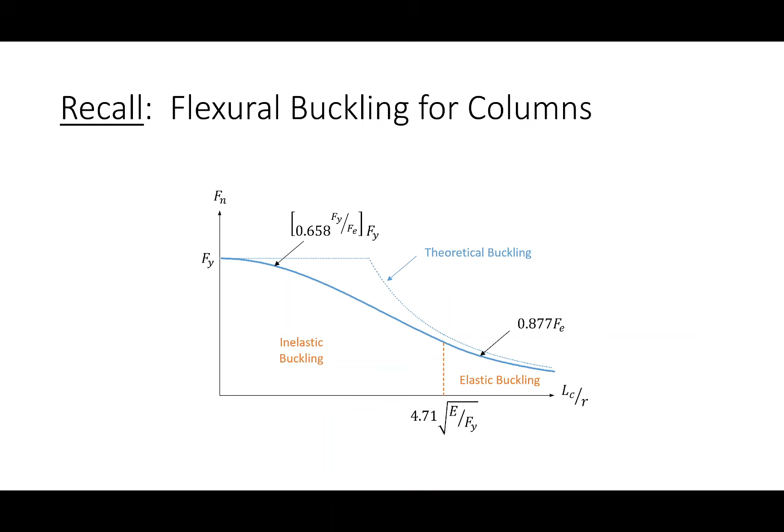Now, we can do that with columns, right? So with columns, we divide out that R to get the L over R term, because this curve really works for any column in the book. Now this curve does too, but because it's so multi-parameter, there are so many different parameters that go into the beam curve, there's a unique beam curve for every beam, which is why we just go with LB. But it's the same idea: we take a look at our slenderness and compare that against our curve to see what range we're in, and based on that, we determine our capacity.

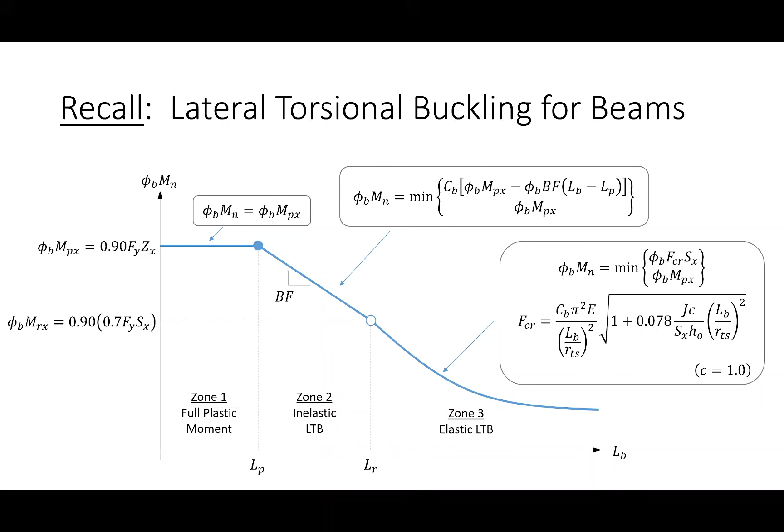Both of these curves, whether it's the column curve or the beam curve, have a latent assumption baked into the background: that local buckling does not happen, or at a minimum, doesn't happen first. If you go down to the lab and start testing columns and beams, loading them to failure...

If you bend that beam like crazy, you'll find that failure is usually a mixture of global buckling and local buckling. It's just a question of which one happens first. This entire semester we've been assuming, although we haven't really been talking about it, that global buckling happens first, and we haven't really been considering local buckling.

So, all right. Does that make sense?

Does that make sense? Okay. Now, like I said, the big question about local buckling is whether it's going to occur before global buckling. The answer is no, you can sort of ignore it, because the idea is... let me put it this way.

If we go back to tension members, we were looking at gross section yielding and net section fracture. If I find that net section fracture occurs before gross section yielding - say net section fracture capacity is 200 kips, gross section yielding is 300 kips - I can ignore gross section yielding. That doesn't matter anymore. What matters is the limit state that governs.

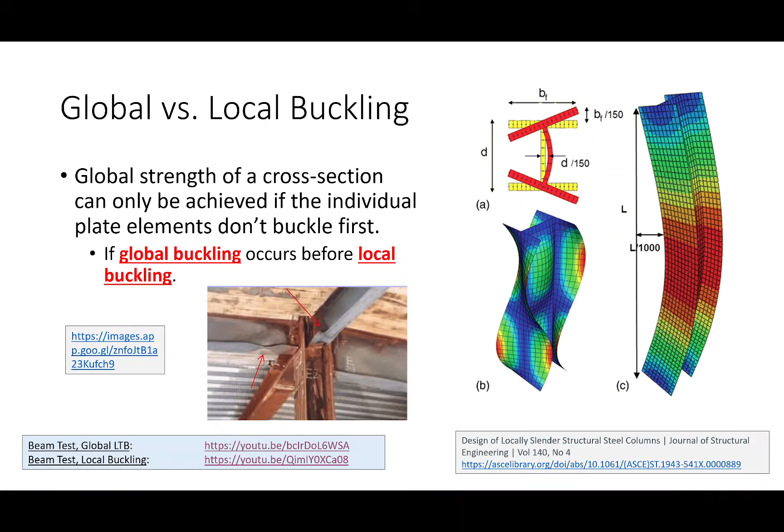Now what I'm saying is that for the vast majority of elements we've been looking at, local buckling hasn't happened first, but there are instances where it could happen first. In general, if you don't know, then you need to establish that first.

I'm not one to, I'll admit one of my pet peeves is when I'm in a presentation and somebody presenting their work goes back and says, you know, I did this during my research, and then it has absolutely nothing to do with their topic. They just wanted to talk about their research, you know, look at what I did. So I really don't talk about that much in class.

We were trying to apply that as a modular system for accelerated bridge construction. One of the things I was trying to do in my dissertation was figure out its capacity - how do you calculate the flexural capacity of a beam like that? Because you need to do that in order to design with that beam.

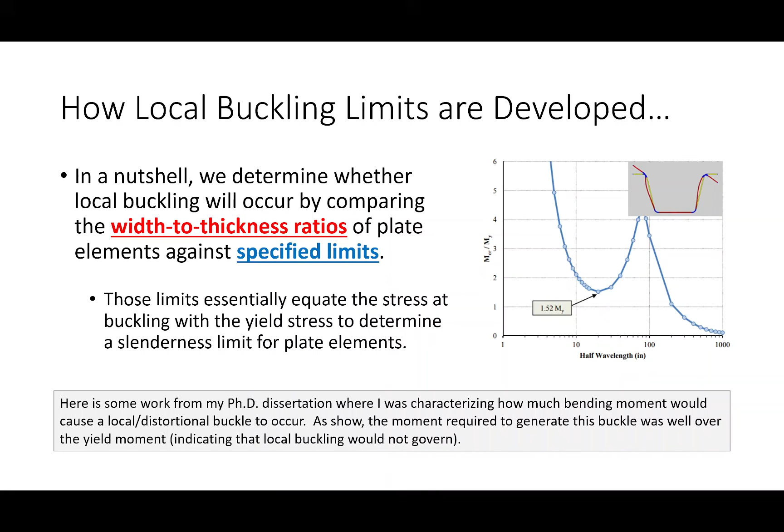So basically that told me that I didn't really need to consider local or distortional buckling for my capacity, and really the only thing that mattered was the global regular old LTB we've been using this whole time. And so that was one of my findings in my dissertation.

Now, I wanted to mention it because that method is basically the same thing that AISC uses in the establishment of limits for local buckling for columns and beams. So how does this work?

Let's just limit our discussion to W sections. If you go to any of the pages for W sections, we have what are called compact section criteria. For those compact section criteria limits, what we list is a ratio BF over 2TF and a ratio H over TW. We've already used this one a little bit because we used it for shear.

Now these are the slenderness measures of the associated plates of a cross section. So if we're talking about an I shape, H over TW is the width to thickness ratio of this plate. So the bigger that H over TW is, the more slender or the more flimsy that plate is.

In the case of a flange, what we're worried about is not the entire flange, we're sort of worried about this outstanding element of the flange here. Think of this as a boundary condition and this is a free end. So what we care about is this width over this thickness, so that's half of this divided by TF. That's why there's that 2 there.

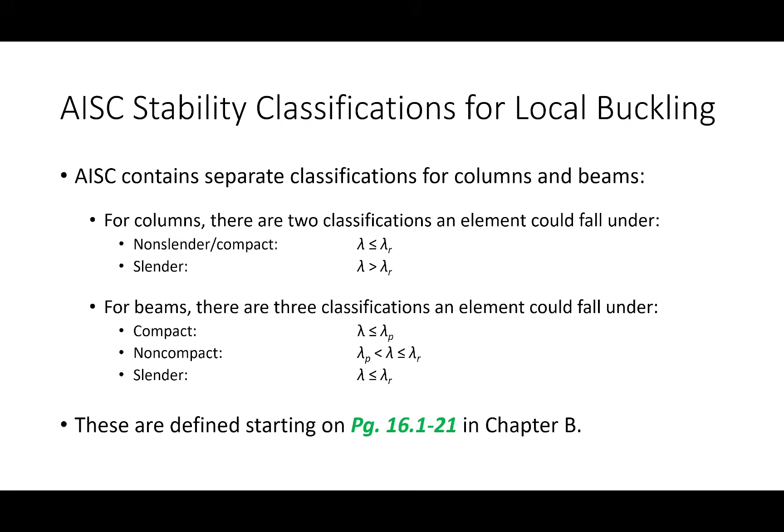Now, where do we get these anchor points like this lambda P and this lambda R? We get them in the spec, in chapter B. This is on 16.1-21, I think. I would open to that right now. So this is in chapter B, the general requirements that pretty much every shape needs to assess.

Now there's a table B4.1, and that's split up into 2 sections. There's a B4.1a and a B4.1b. I want to make sure everybody can find this.

So, I think the B4.1b table actually goes across 2 different pages, like there's a front and a back. Is everybody able to find that? Looks like most people are able to find it.

Okay, so there's 2 tables, B4.1a and B4.1b. So what does it say? Width to thickness ratios, members subjected to axial compression. So B4.1a, that's my column table. B4.1b, members subjected to flexure, that's my beam table.

Now, one thing I did kind of gloss over a little bit, there's a table for columns and a table for beams. But look over here on the very left. So on the column table, there's a range of cases for unstiffened elements and a range of cases for stiffened elements. So what's the difference between those two?

Unstiffened elements are plate elements that are only supported on one edge. An example would be the flange of an I-shape. If we're talking about angles, like the leg of an angle, it's supported on this end but not this end. Or if we're talking about this leg, it's supported on this end but not this end. What about T-shapes, the stems of the various outlying elements?

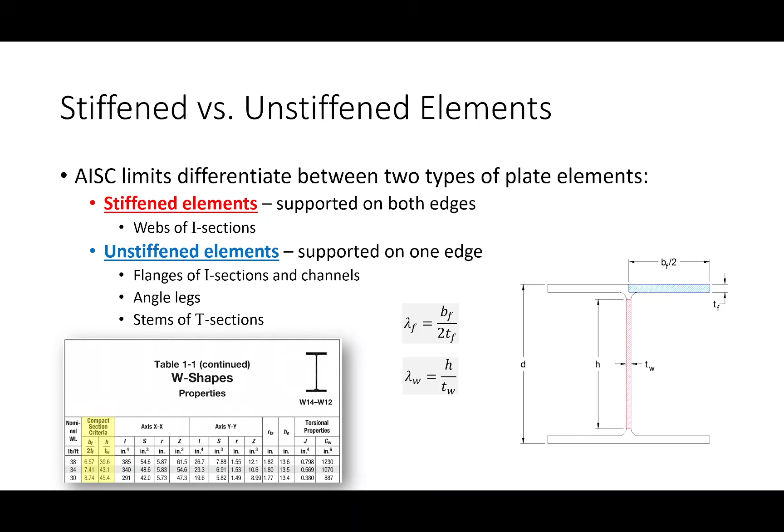All right, so when we go to the spec, if we're looking at columns, we have a series of cases of unstiffened elements, a series of cases of stiffened elements. For beams, a series of cases for unstiffened elements, a series of cases for stiffened elements. And what we would do is classify those sections based on their behavior under compression and based on their behavior under flexure.

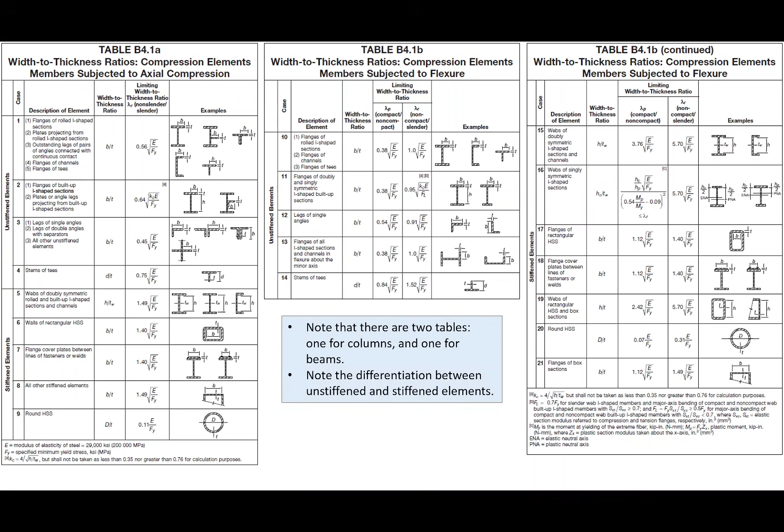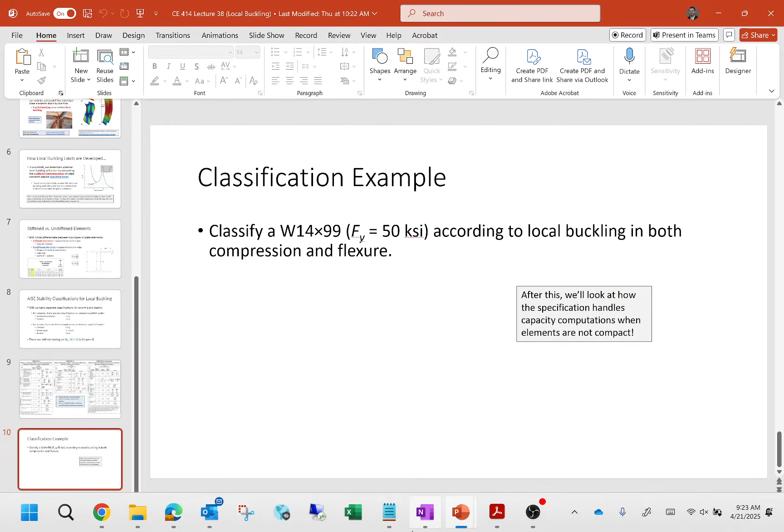Okay, and to show you how that works, let's do a quick one. Let's classify a W14 by 99. I'm going to need your help on this one. We're going to classify it according to both compression and to flexure.

By the way, I'm sure some of you could read table 1.1 and sort of see where this is going, but even if you read table B4.1 or table 1.1, it doesn't give you all the details. So you do end up needing to do this even if you know the section is classified one way or the other. There's really no other way of getting around it.

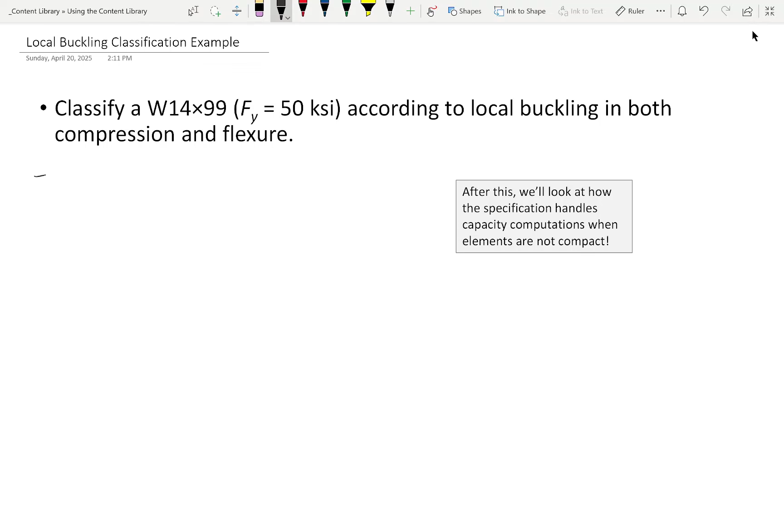Okay, let's start off with this. I want somebody to look up the properties for a W14 by 99, and what I want you to tell me is this and this. By the way, if you see me call them lambda F or lambda W, that's what those are. Lambdas are your dimensionless slenderness parameters that are often used in steel and stability calcs and whatnot.

So what's my flange slenderness? Lambda F is... 10.2? Oh, my bad, 9.14? 9.34. Okay. What about H over TW? 23.5. So 9.34 and 23.5, okay.

All right, okay, so now what we're going to do is, I just need those values off to the side. Now what we're going to do is we're going to start classifying. I'm going to start off with the easiest one first, and we're going to classify according to compression.

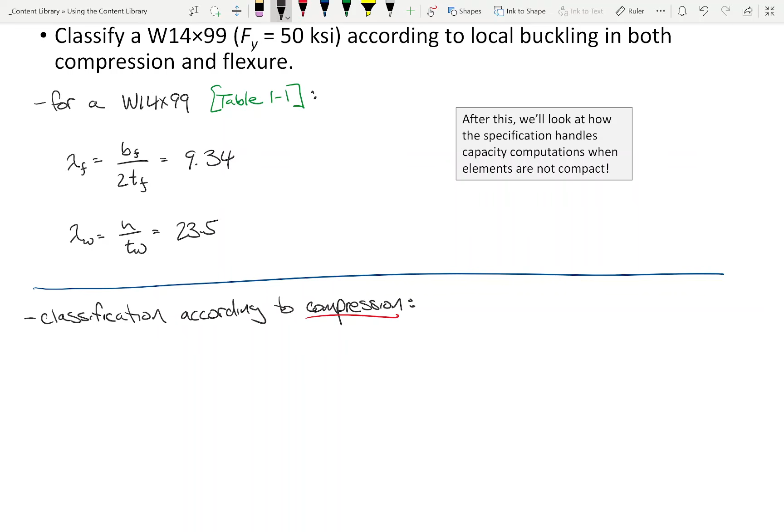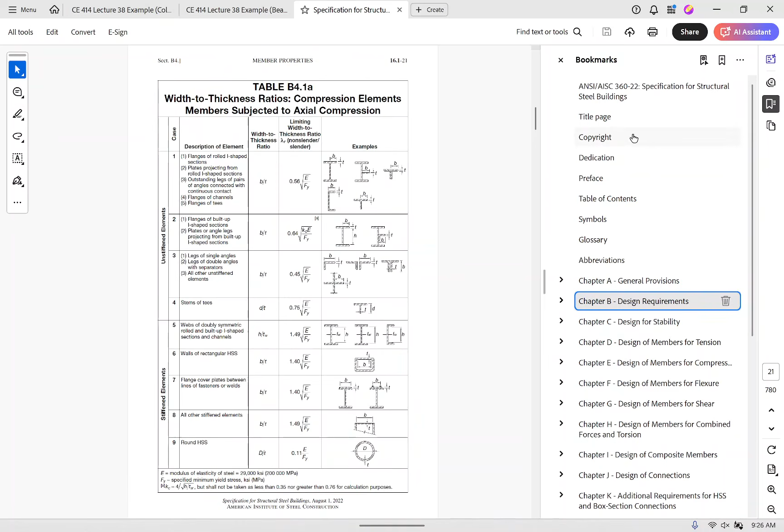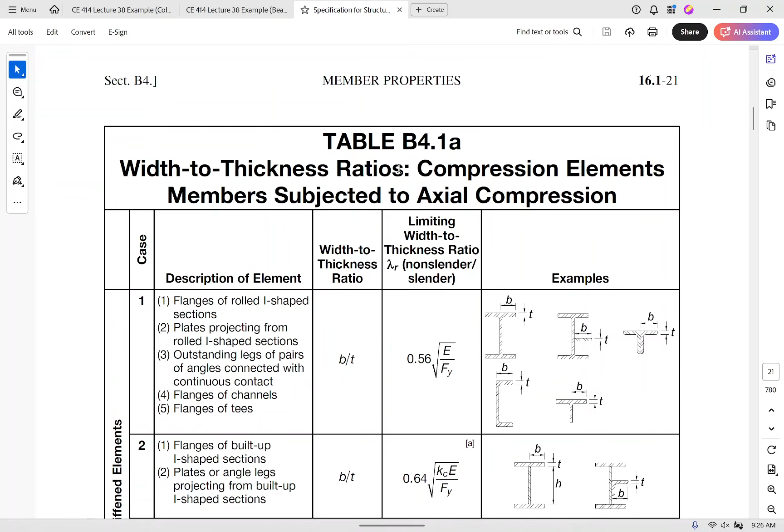Okay, so we're in chapter B. I'm at this table. Width to thickness ratios, compression elements, members subjected to axial compression. So I have unstiffened elements and I have stiffened elements.

How many cases do I have for unstiffened elements? I've got 1, 2, 3, 4. Do I need to consider case 4? No. Case 3? No. Case 2? Okay, what about case 2? Flanges of built-up I-shaped sections.

Is this a built-up I-shaped section? No. A built-up I-shaped section would be like a plate girder where you take a plate and weld them together. That's not a W section. A W section is rolled out of the mill as a single I-shape. So do we consider case 1? Yes, flanges of a rolled I-shaped section.

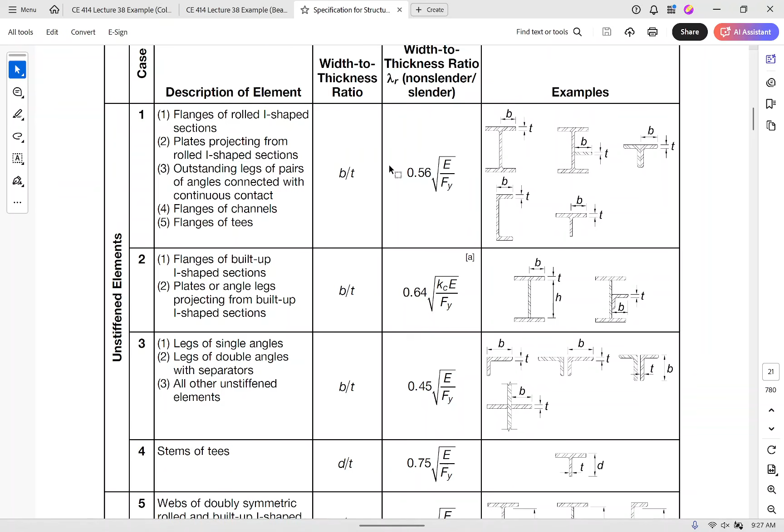Yes, we are considering case 1. So our width to thickness ratio, B over T. What is the B over T? Well, it's this, right? Which is what we looked up. What do we compare that against? This right here. Remember how I said a number times the square root of E over Fy is going to show up a lot? Well, I meant what I said.

Okay, so let's look at lambda R. I'm going to call it lambda RF for the flange. So what did we get? What did it say here? 0.56 square root of E over Fy.

What is this? 13.49. 13.49. Okay, now what does this mean? Let's think about this. So I have BF over 2TF and I have lambda RF. What I'm finding is that lambda RF is bigger, right? So let's think about this a little bit.

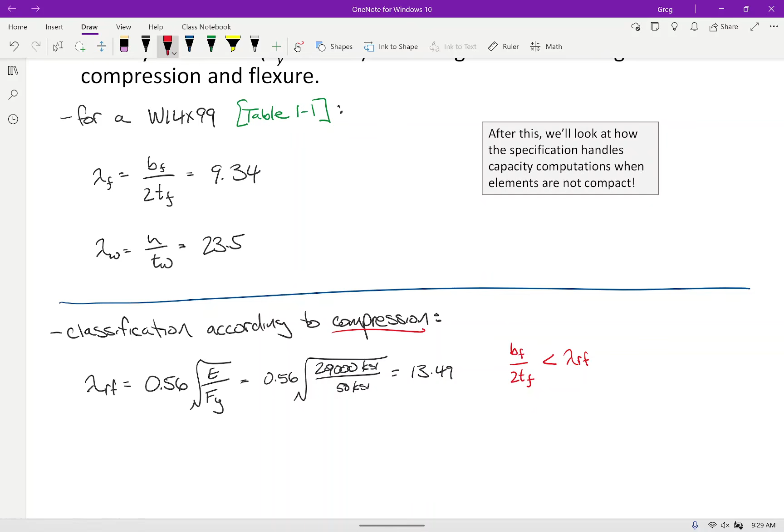So this is a measure of how flimsy the flange is. This is an anchor point. And what this point is saying is that if your flange is flimsier than this, then you need to start considering local buckling. So my question for you is, do we have a flange that is slender, or do we have a flange that is compact? It's compact, right? Because this is basically saying if your slenderness gets bigger than this, it's flimsy and we need to consider it slender. But our slenderness value is this. So because that's smaller, this is a compact flange.

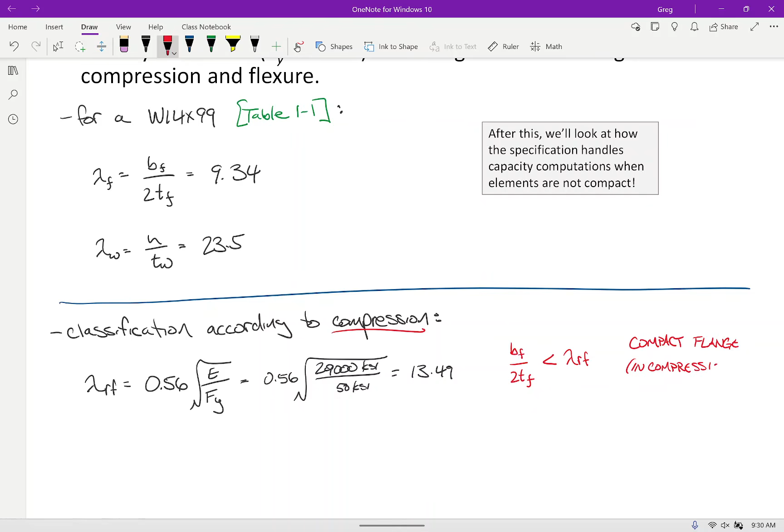And I'll say in compression. So what this is saying is if you use a W14 by 99 as a column, you don't need to worry about the flange buckling. What about the web?

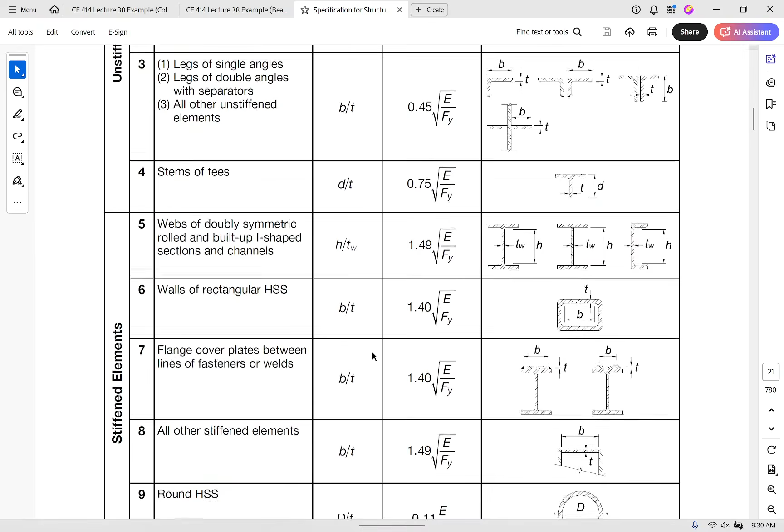So I ask you to open up your spec and tell me what is lambda RW going to be? First off, are the webs unstiffened elements or are they stiffened elements? So if we have the web of an I-shaped cross-section like a W shape, like a W14 by 99, what is my slenderness limit? 1.49. Okay, so just to make sure we're all on the same page, we're down here in our stiffened elements. We go to case 5, web of a doubly symmetric I shape. Right there, 1.49.

So what is this? 35.88. So now we have an H over TW, which is also less than the limit. So what does this mean? Do we have a compact web or do we have a slender web? Remember, with columns, we just have compact or slender. There's no third range. Compact.

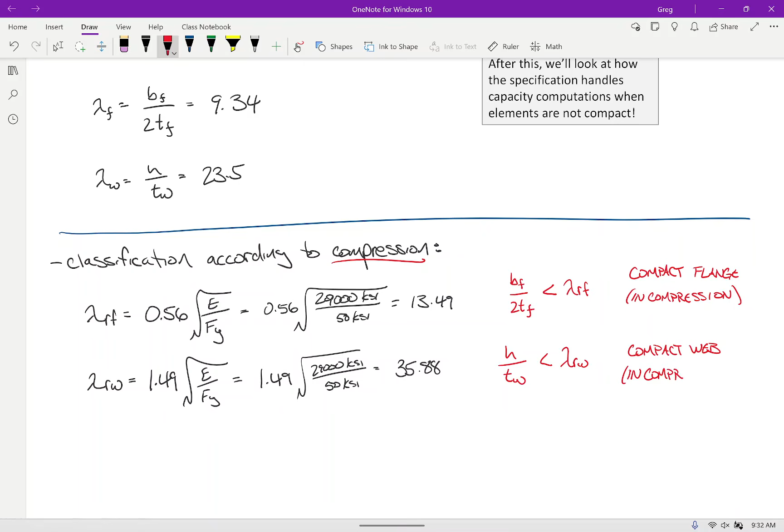Okay, so what this is saying is, let me ask you what it's saying. Do I have to consider local buckling for this shape if it's a column? No, I don't. So what this check is essentially saying is, remember all that column stuff we did a few weeks ago? You can do that column stuff on this column, and it's A-okay. You don't need to consider local buckling for a column if it's a W14 by 99 of 50 KSI steel. Don't have to worry about it.

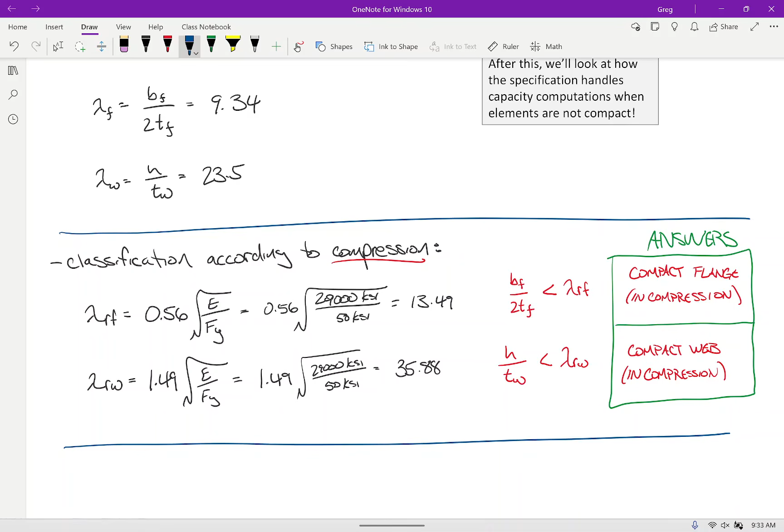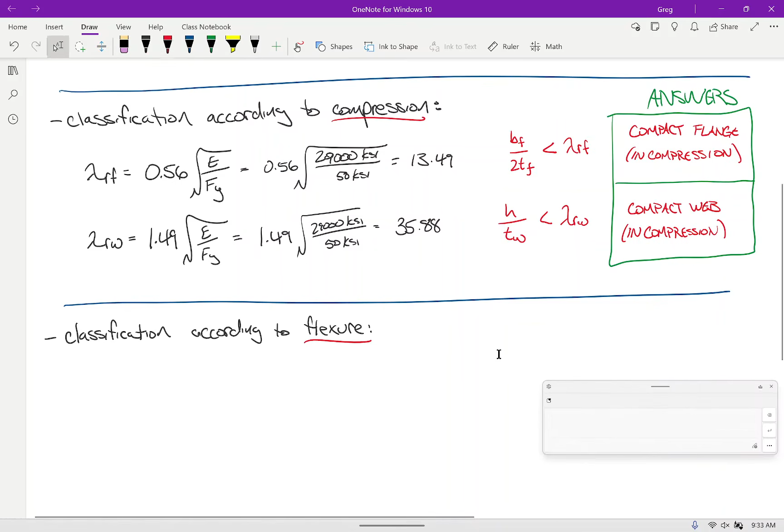So I wonder what's going to happen if we classify according to Flexure. So now what we're going to do is we're going to say, okay, let's not use the W14 by 99 as a column. Let's use it as a beam. So imagine using a W14 by 99 as a beam in a building. How do we classify according to Flexure? Well, we go to this, go to members subjected to Flexure.

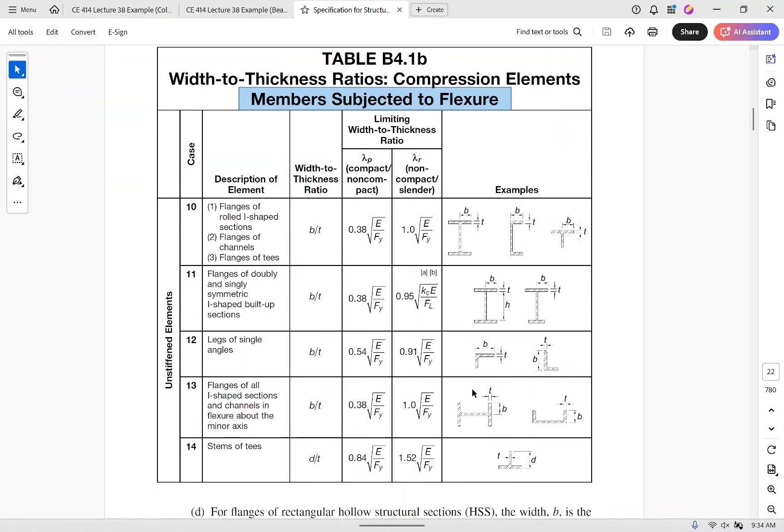0.38, 1. Okay, because remember with beams we have 3 zones. We're trying to figure out what zone we're in. So we're going to have a lambda PF and a lambda RF. Lambda PF, and we have 0.38, 1.

Would you all trust me if I just gave you these answers right here? Okay, so this one, 9.15. We have 24.06. Remind me, hold on. What was that? 9.34. 9.34. Okay, so hold on, let's see.

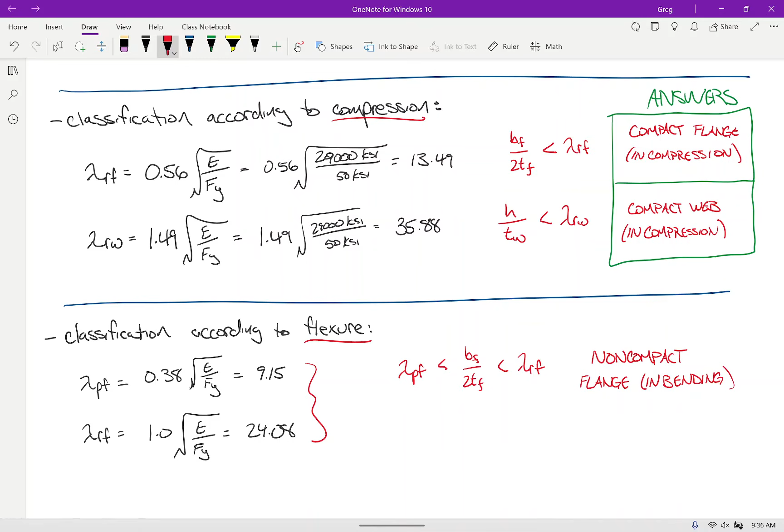So that means our flange slenderness is between these, isn't it? So if your LB was between LP and LR, you would say you're in zone 2, right? So do we have a compact flange? Do we have a non-compact flange? Or do we have a slender flange? Non-compact. We're in between, okay? So, non-compact flange in bending.

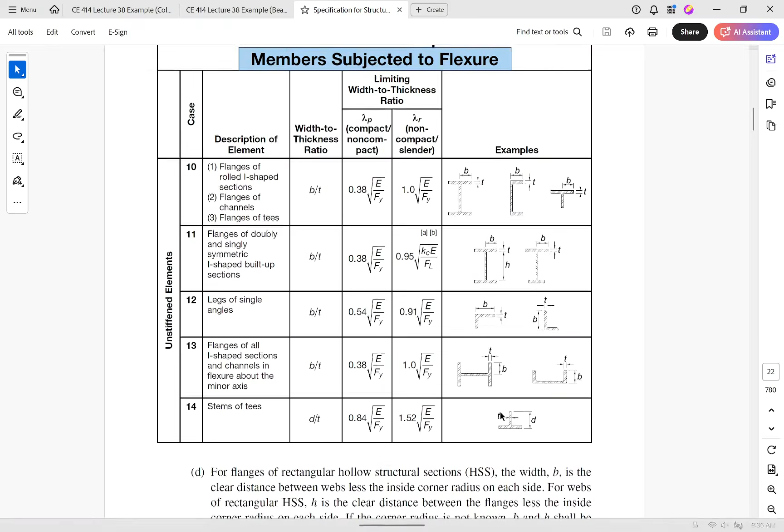Now what about the web? What case are we going to be dealing with the web? 15. So we're going to have 3.76 and 5.7. So let's see what we get here.

3.76 and 5.7 times the square root of E over Fy is another one of those cases where if I give you the value, you'll trust me. Oh, it would help if I didn't go away.

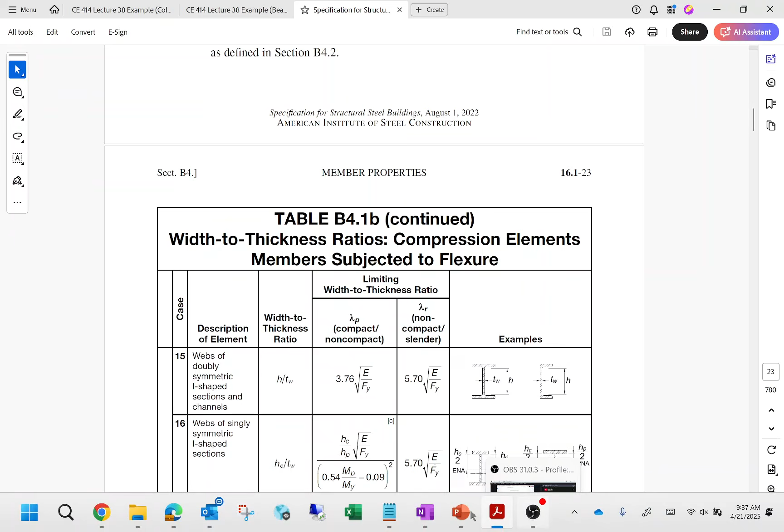Okay, and by the way, what was our H over TW? 23.5? Mhm. I think this marker is done for. I don't know how I made that, but I did.

So, what zone are we in this case? Compact, like zone 1, right? So, because this is saying, or here, maybe I'll write it like this.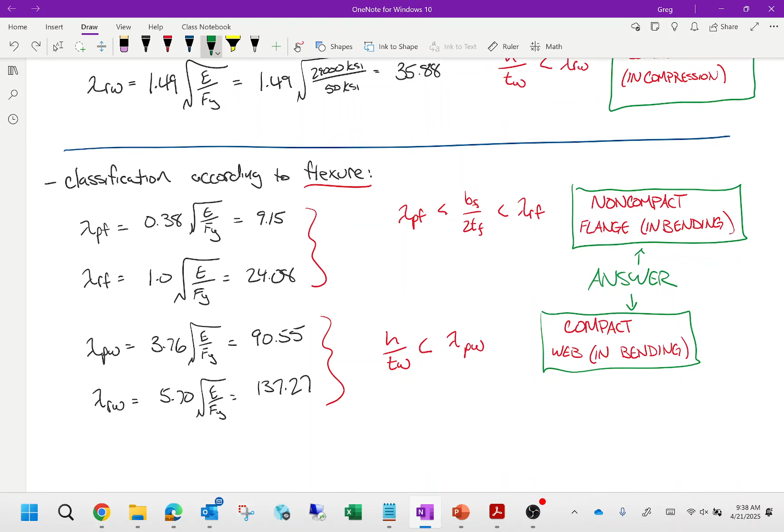Okay. Maybe I'll put N answers. If I could write an S more clearly. Okay. All right, does that make sense?

Okay. Now for the next couple minutes, we'll have sort of a movie time type thing where I can show you what happens here. But before we move on, any questions?

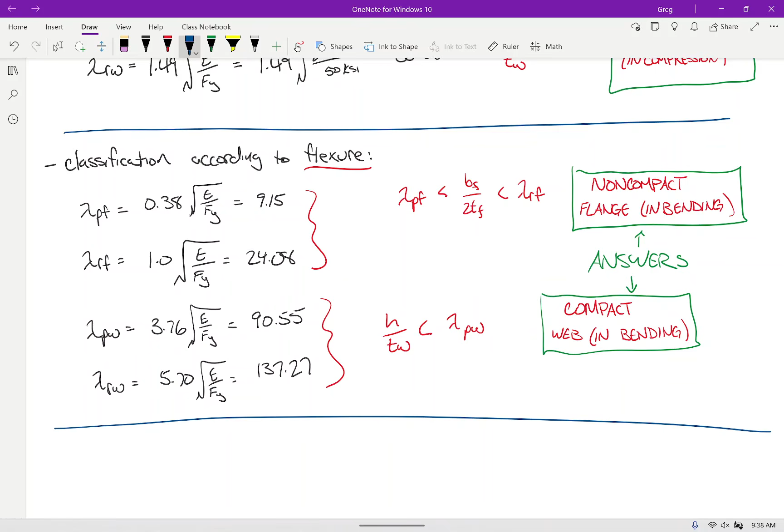So I'm giving you another classification problem here, but I want to say a few words about this problem. Okay, which shape was this? A W14 by 99? Okay, so if we go to the manual, so here's the manual, and we go to the W14 by 99, what do we have here?

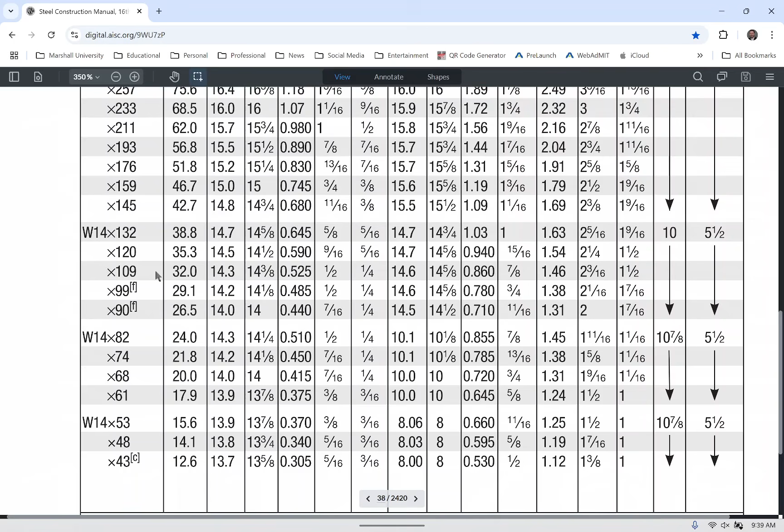We have a W14 by 99, but there's this little footnote right here, right? The little F. What does the F mean? Well, if we go to the bottom, it says shape exceeds the compact limit for flexure with Fy equals 50 KSI. Doesn't quite tell you if it's the compact limit for the flange or the web, but it does exceed it, right? And so we're going to have to handle that in some fashion.

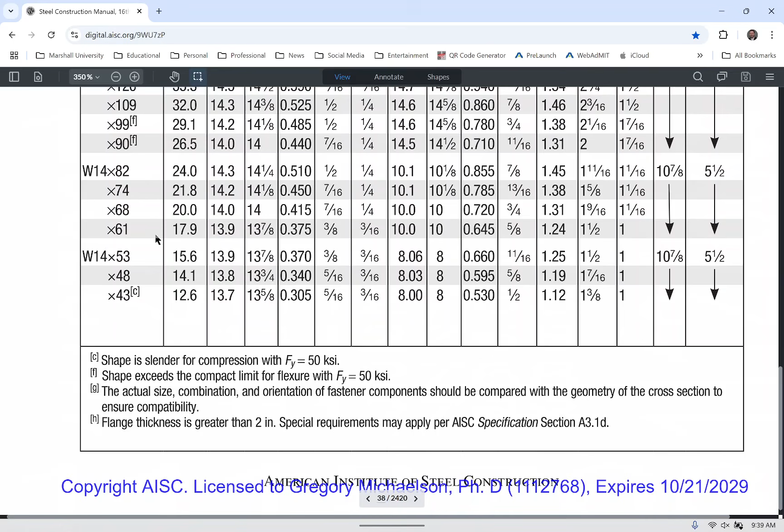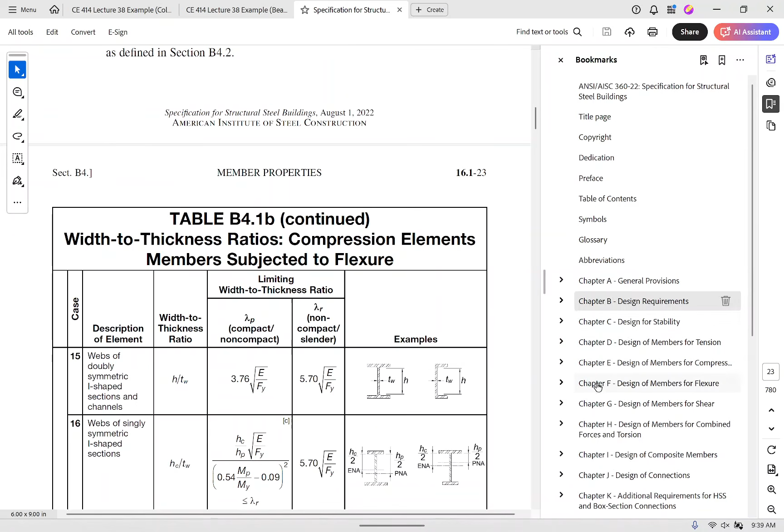Okay. So let's talk about handling that. Okay. Let's talk about that. Okay. I want to go to the spec, and let's do beams first. Okay. Let's look at beams.

Okay. So now that we have a little bit of a larger picture with this stuff, let's read this a little bit. Okay. All right, this is chapter F. I want to read section F2. Doubly symmetric, compact I-shaped members and channels bend about their major axis. So what F2 is saying is that both the web and the flange are compact in bending.

Okay? So how about this? F2, compact flange, compact web. Okay? What does F3 say?

F3 says doubly symmetric I-shaped members with compact webs and non-compact or slender flanges. Okay. So F3, non-compact or slender flange, compact web.

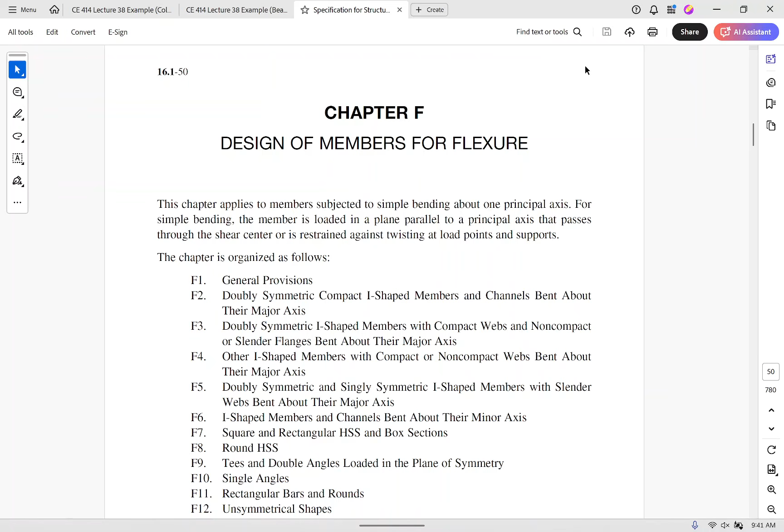Okay, so let's just sort of review these specs a little bit and see what's going on here. Let's look at section F2. And I'm going to get to that user's note, by the way, here in a bit. I skipped over that. That's kind of important.

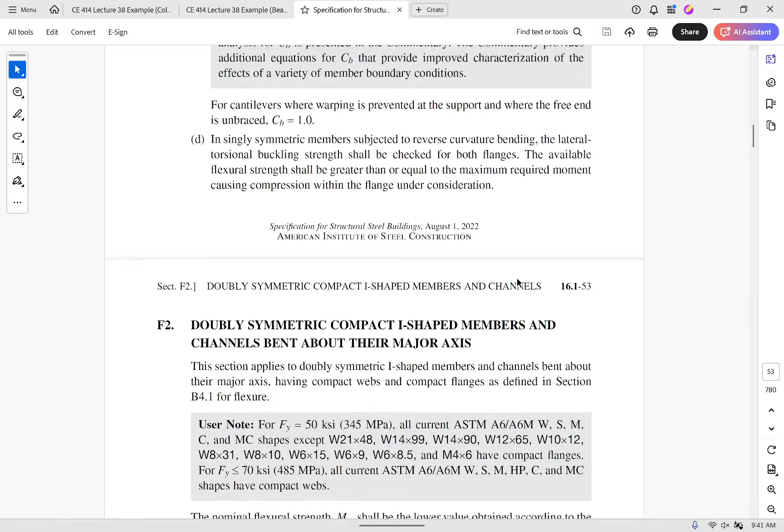Okay, F2. Okay, first off, does the stuff in this section look familiar? Okay, this is section F2. We have two limit states to assess. We have yielding, we have lateral torsional buckling. What's the deal with lateral torsional buckling?

When we're in zone 1, we don't apply LTB because we just use that. When we're between LP and LR, we use that. When LB is greater than LR, we use that. This should look familiar, right? Okay, this should look familiar.

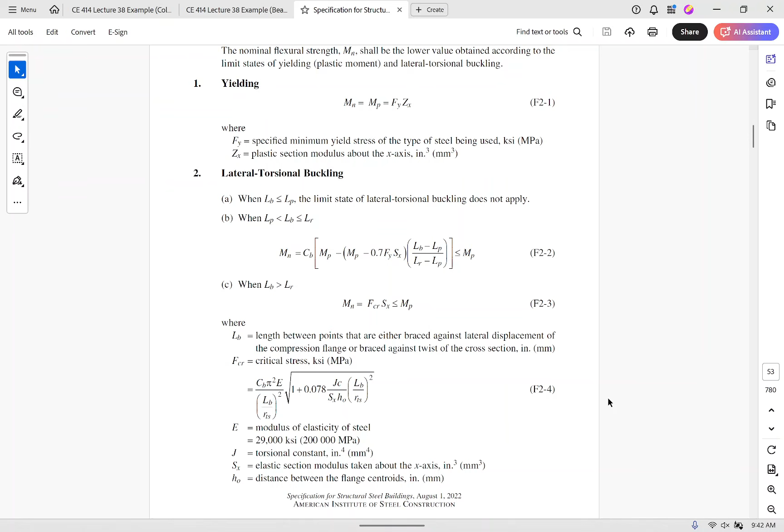This is what we've been doing this whole time. And I propose what we've been doing this whole time works fine and dandy if the section is compact. Now, what does this little user note say right here?

For Fy equals 50 KSI, all current ASTM sections except these have compact flanges. It's almost like I engineered this problem for that not to be the case. So how do you handle a W14 by 99? Because it has a non-compact flange, does that mean if you put a feather on it, the beam explodes? No, it doesn't mean that.

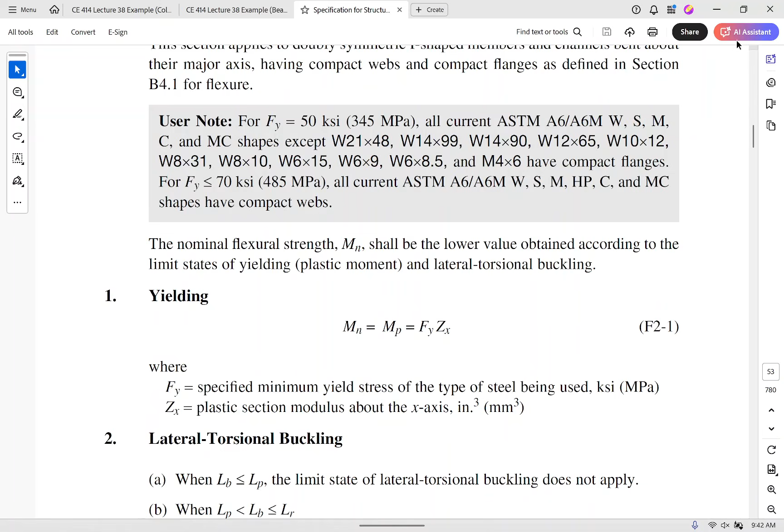All it means is that you just have to use a different section of the spec. We have to use F3, okay? So what's the deal with F3? It's just different equations, right? It's a different model. We have, for sections with non-compact flanges, we use this equation instead, okay?

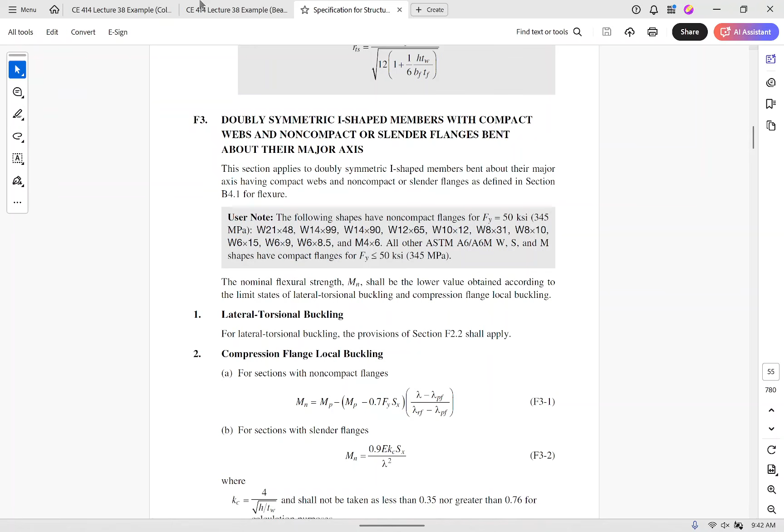Very plug and chug. So much so, let's take a look at this. So I posted this to Blackboard, by the way.

So let's compute the flexural capacity of a W14 by 99 if it's 50 KSI steel, and we'll assume that LB is 0. Okay, so how do we do this?

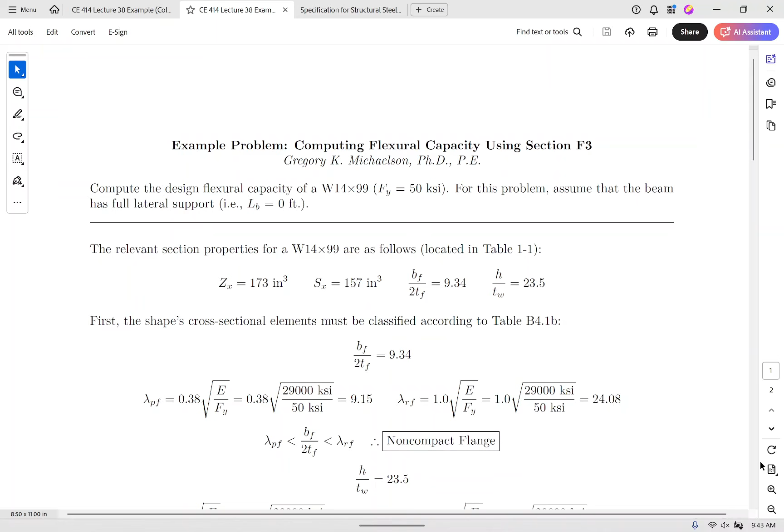The first thing we do is we look up some stuff. We've already looked up these two, and I looked at these because I'm going to need them later in the problem. The first thing I have to do is classify the cross section.

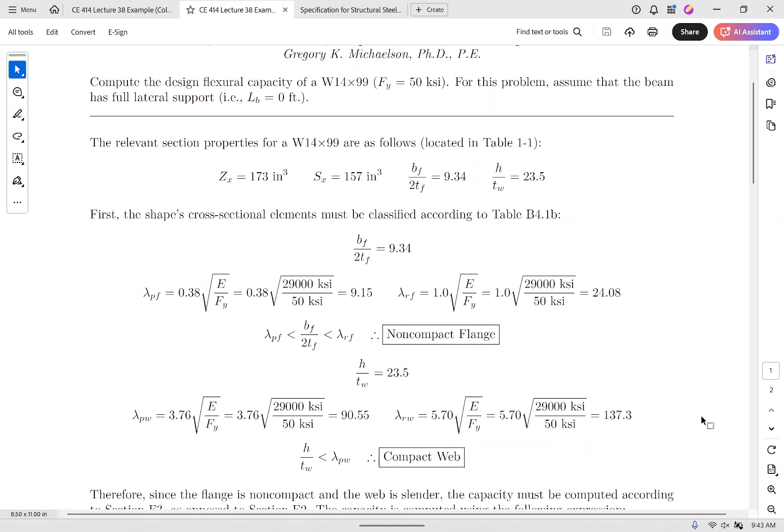I literally just did this for you all just now. We have lambda PF, lambda RF, lambda PW, lambda RW. We know it has a non-compact flange and a compact web. So if you have a non-compact flange, all you do is calculate your MN capacity like this. We have to calculate MP in this expression.

MP is FY times ZX. I'm leaving everything in inch-kips right here because I'm going to have this. So 0.7 FY SX, that's MP, that's that term right here. Plug and...

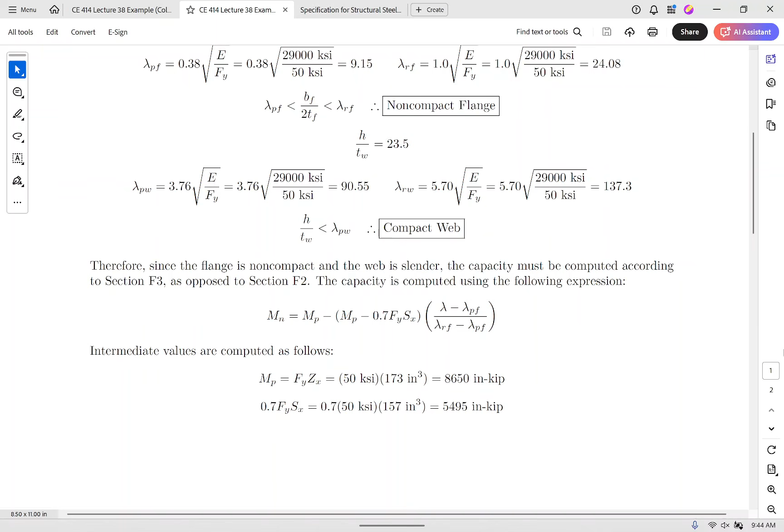There you go. There is sort of a reason I'm not doing this problem explicitly for you here on the screen. Some of you are graduating here in a couple weeks, some of you got a little bit longer, but the point is, you're all going to be working as engineers doing problems that I never taught you how to do, because you do need to be able to research the spec and follow this stuff on your own. My suggestion would be to take this example, go to the spec, and see if you can follow along what I'm doing and why. If you could do that, then you could do other problems the same way.

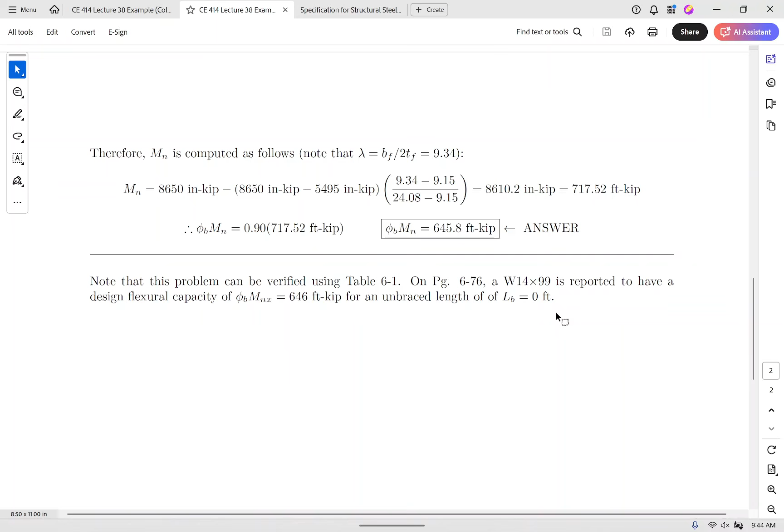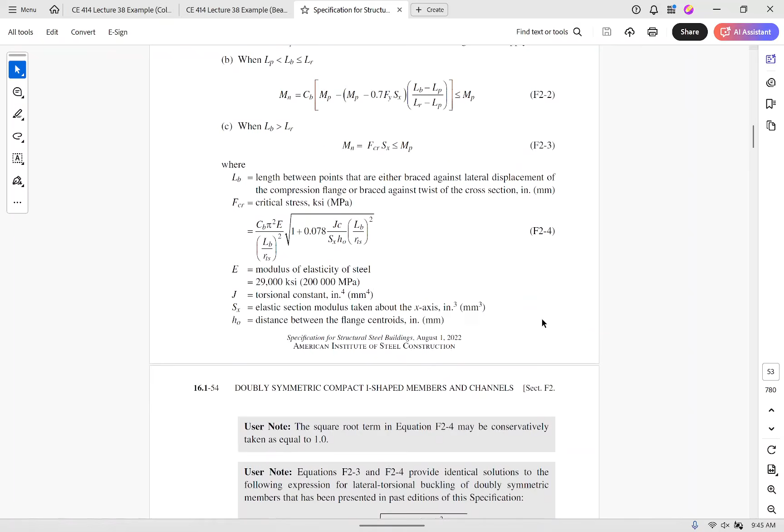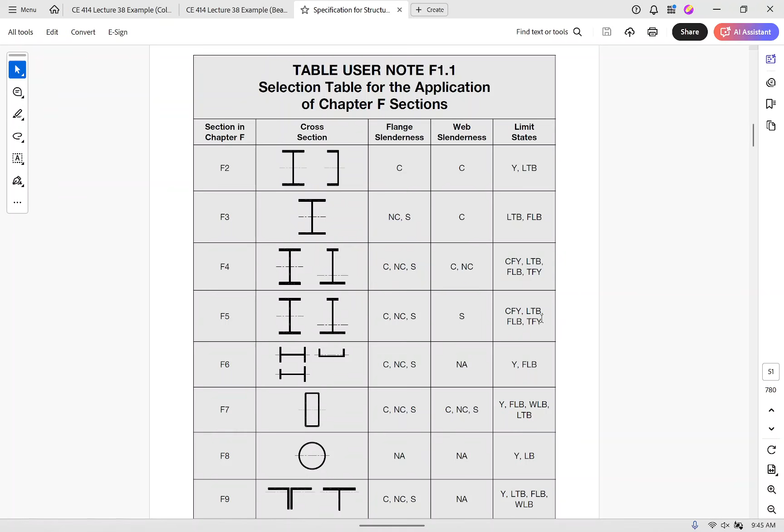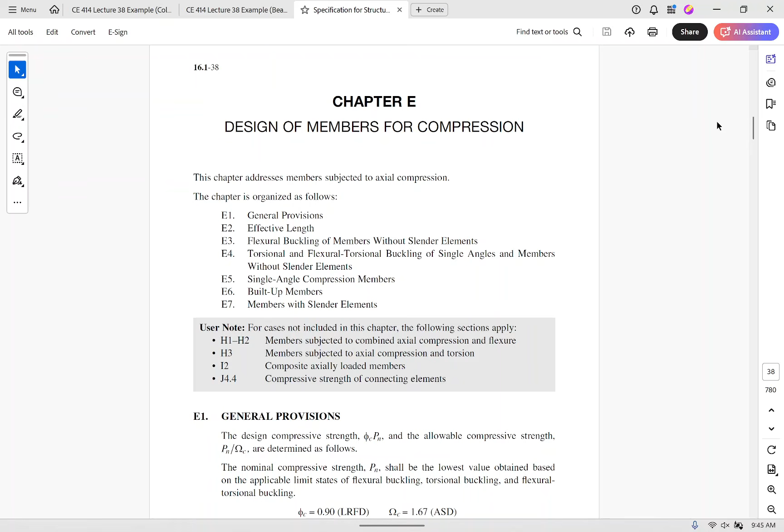For example, now that's beams—let's go back to columns. Let's read these sections of the column spec. So what do we have here? E1 is general provisions, E2 is how to calculate effective length, E3 we've been using this whole time: flexural buckling of members without slender elements. What is E3? Let's go to E3.

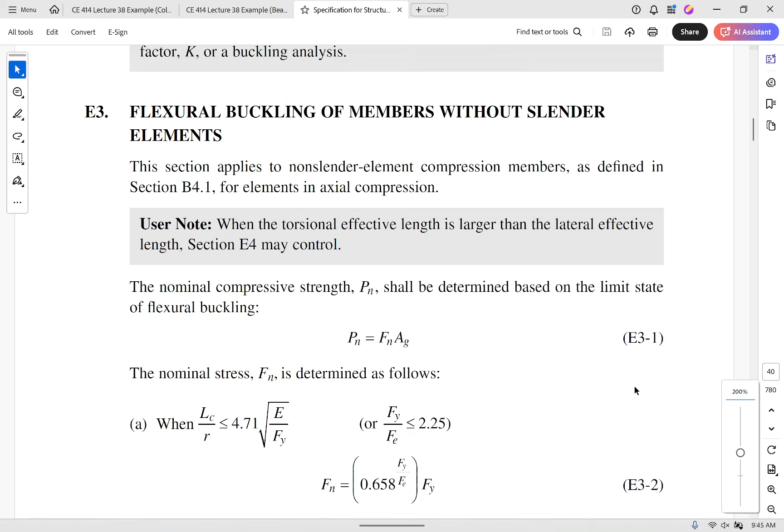I don't know about you, but that looks kind of familiar to me, doesn't it? Okay, so what's going on here? So here's E3. E4, torsional buckling—that's if you're trying to assess if the element is twisting. We're not really worried about that here.

Single angle compression members, that's if you take an angle and put it in compression. So for you folks doing the bridge, if you had a member in compression, you could actually calculate the capacity this way. Built-up members—that's plate, web, plate, plate girder, things like that. E7, members with slender elements. So what if you had to calculate the capacity of a column with slender elements?

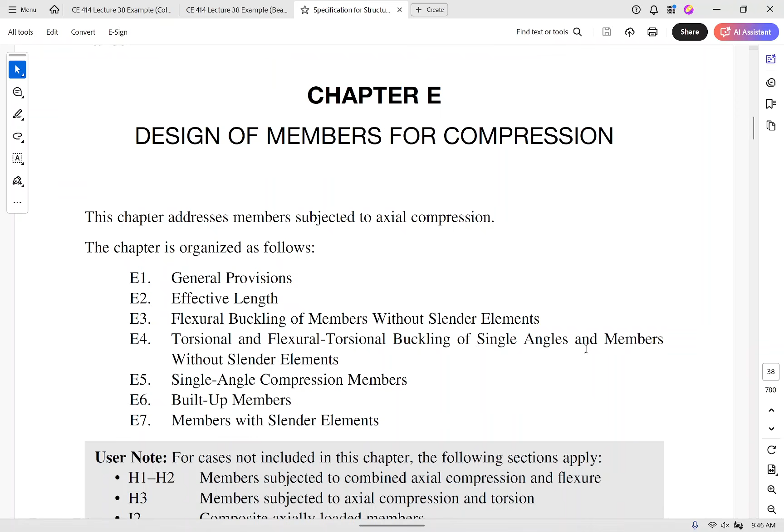Let's calculate the capacity of a W21 by 44. We'll assume that the column's pinned on both ends and it's 10 foot long, so we know what KL is in either direction. How do we do this?

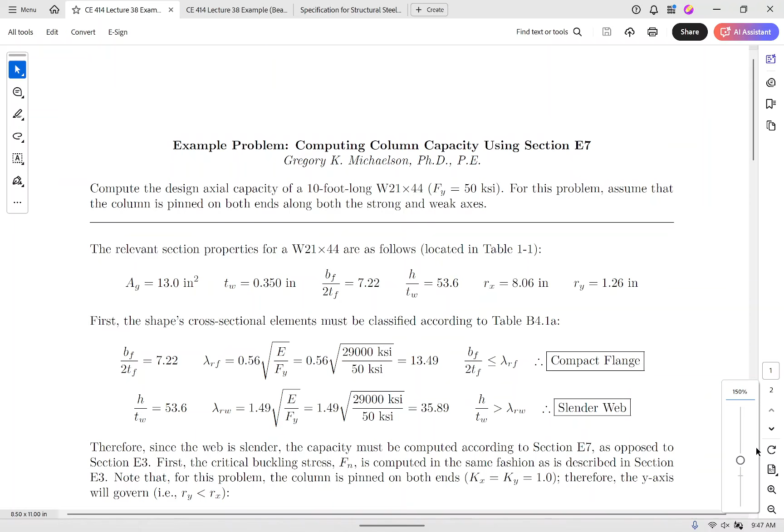The first thing we do is classify the column. We find that it has a compact flange but a slender web. Then what do we do? We just follow the spec. Now, I'm going to let you all follow this on your own, but I'll give you at least a little bit of guidance.

Ultimately what we're trying to do is this calculation right here. The way the spec handles column buckling is if you have a slender element—in this example we have a slender web—here's your cross section, but instead of using the gross area, what we'll do is use like this area.

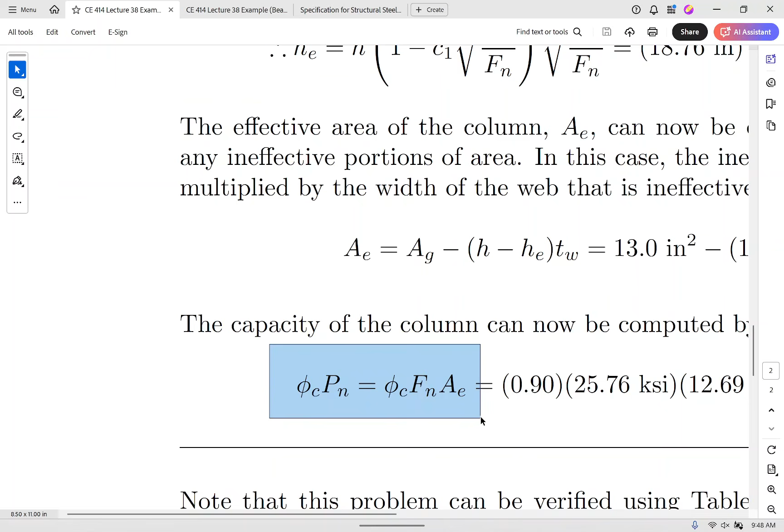And we'll call this area the effective area, because basically it's saying that this part of the web right here has probably buckled and is kind of worthless. So we're only going to consider the section of the I-girder that's effective to resist the buckling capacity. All we're doing is calculating this reduced area because of the buckle. It's a little bit more involved, but I'm not doing anything here that you couldn't just follow the spec for—it's really not that difficult.